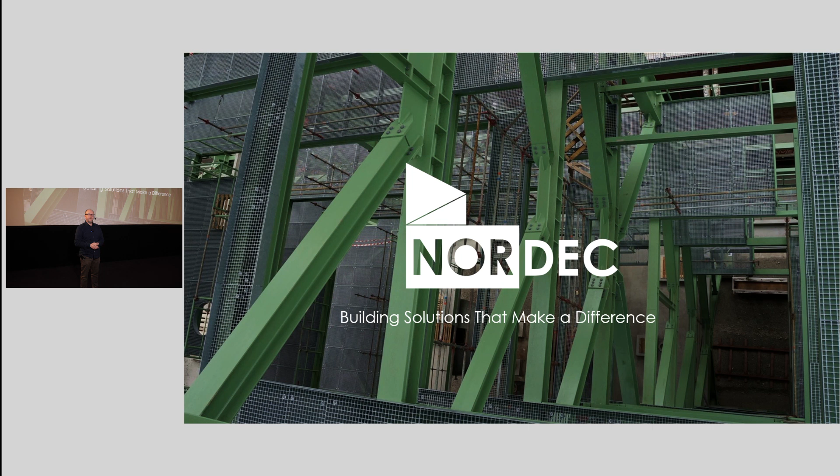So first, really briefly, who and what Nordec is. Nordec is a leading frame contractor in the Nordics. We're headquartered in Finland, but we have operations out in the whole of Nordics and Baltics, Poland, Germany, Czechia, and so on. Steel is really at our heart, and that's where we come from, our main material.

But we also like to mix and match different materials together in the best possible way. And we also like to be involved in the whole value chain in the construction process. We like to start from the design, take part in the product, or we do the production, installation, and so on. We really want to be involved throughout the whole value chain and the whole process, from design to ready-made project.

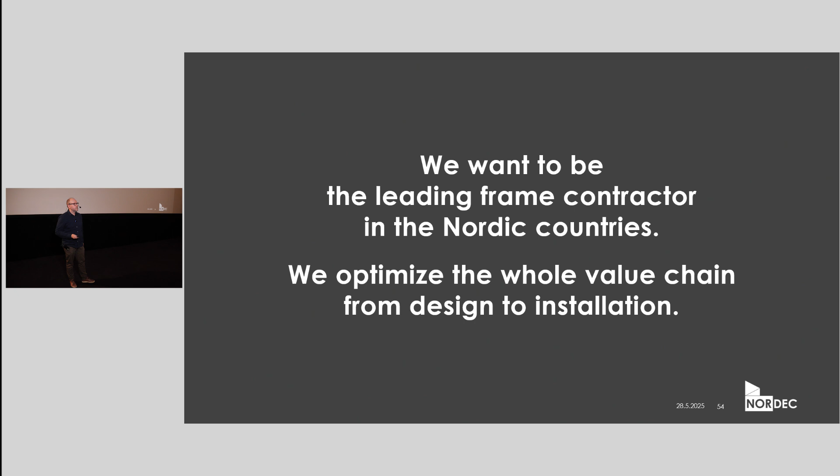So then coming to the main topic today, decarbonizing the construction industry and Nordec's journey towards this target. So first, a few painful facts. I think also the previous speaker told you these numbers roughly. I don't know any Lithuanian, but I can guess so at least.

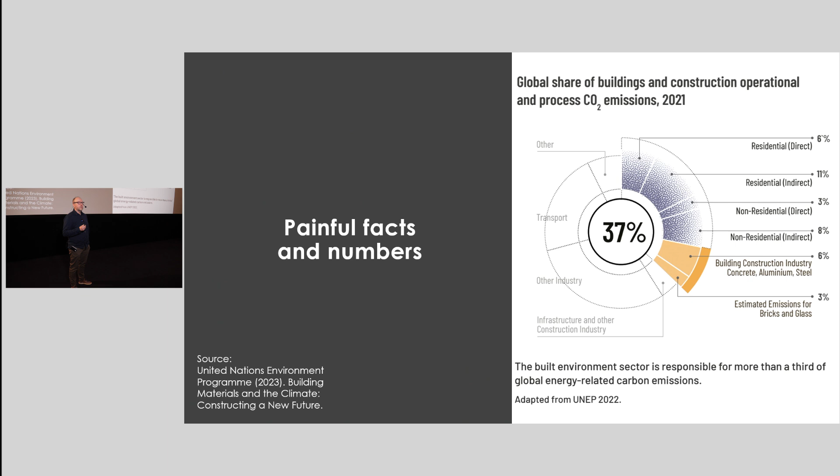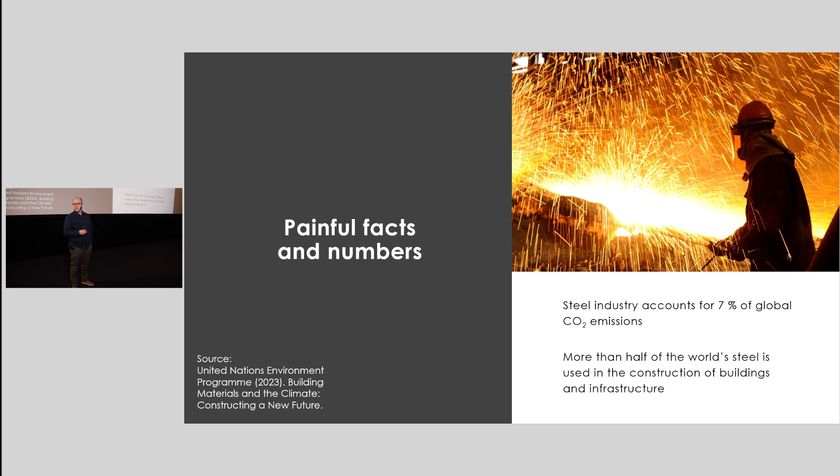We're living in the middle of a climate crisis, as we all know, and the painful fact is that the built environment stands for over a third of the global energy-related carbon emissions. And as we look at steel, steel industry or steel production is responsible for about 7% of the global carbon emissions. So we're talking really big numbers here. And out of this steel, more than half is used for the built environment, for constructions and for buildings and for infrastructure.

Then concrete. As we know, cement is the large polluter in concrete, and cement production is also responsible for another 7% of the global carbon emissions. And concrete is by far the most widely used construction material.

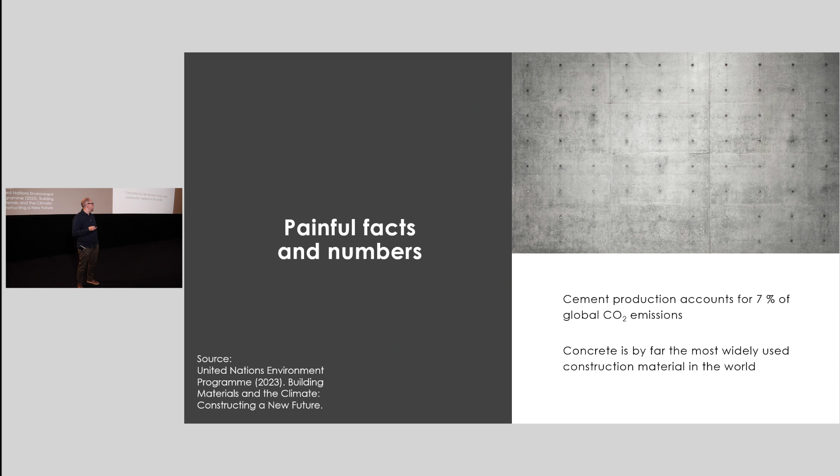So I think it's fair to say that we need to do something now. We can't just do business as usual anymore. But the good news is also that we can act now. We can do stuff, and we do it best together. We need to all pitch in and do something to avoid the climate crisis, starting from policymakers, planning authorities, developers, investors, architects, engineers, users, producers, everybody.

Just a short look at what's going on in the European Union with legislation and regulation that are coming. We have lots of things coming from the European Union affecting us in the construction industry: the new construction product regulation, EU taxonomy, eco-design for sustainable products regulations, and the EPBD, the Energy Performance of Buildings Directive.

I just wanted to point out that through this, life cycle assessment or whole life cycle assessment of buildings will become mandatory by 2028 for large buildings, and by 2030 there need to be national carbon limits for buildings in place.

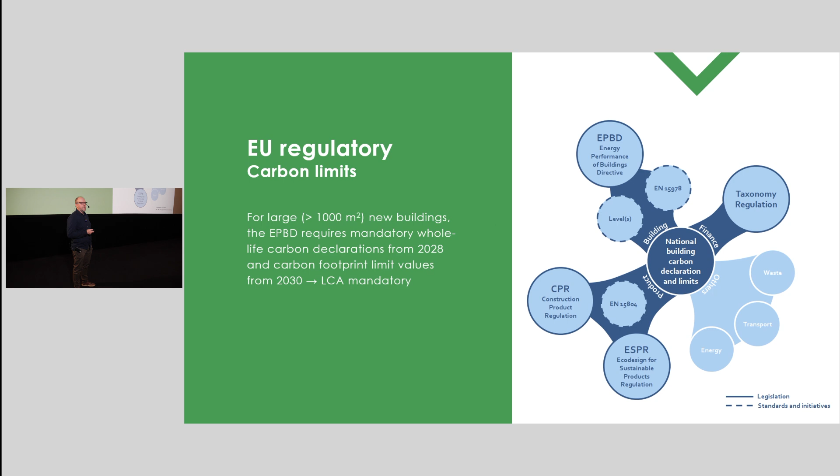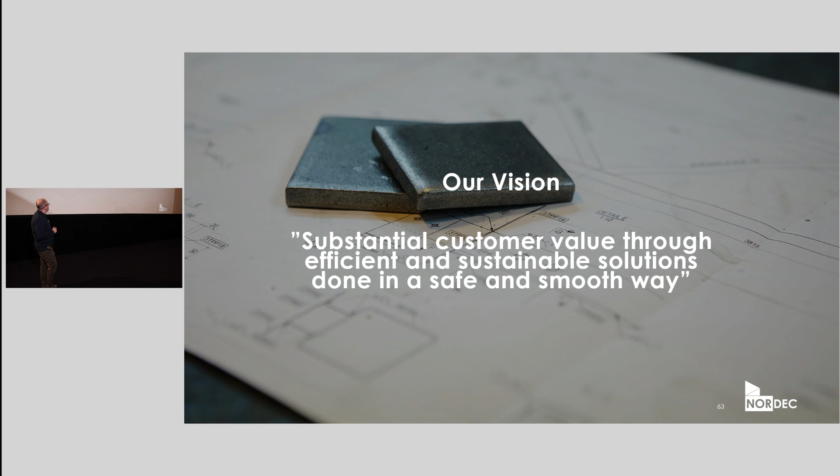Then, what are we at Nordec doing for sustainability? Sustainability is built into our vision, as you can see here: substantial customer value through efficient and sustainable solutions done in a safe and smooth way.

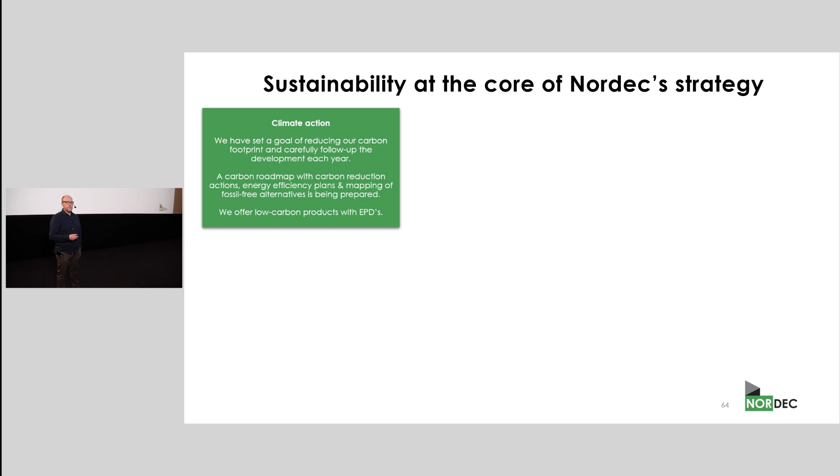So we work on sustainability through a few different topics. Sustainability isn't just climate action, but a lot else also, but climate action is of course one main topic, and I'll talk more about this in a few minutes.

But then we also have responsible sourcing. We need to take care of the whole value chain, so we like to really get involved with our suppliers and subcontractors and work together with them to enhance sustainability throughout the value chain.

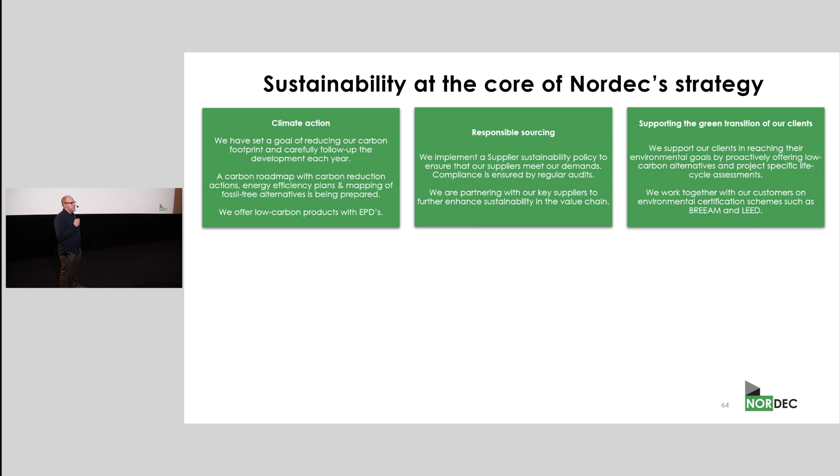We work closely with our clients, but I'll talk more on this also in a few minutes. And then we have a certified environmental management system, which in part means that we have a project-specific environmental management plan through which we take care of meeting all the expectations and requirements in the project.

We also think that everybody needs to be transparent with sustainability, so that's why we're now setting up a comprehensive sustainability reporting system. Part of this is that many of our clients are eligible for the EU taxonomy and want to align with its requirements, so there we also play a part and try to help them.

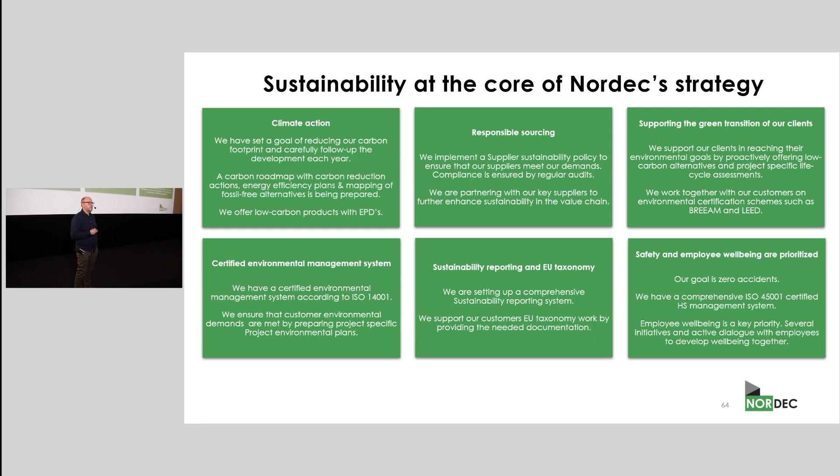Last but not least, safety and well-being is very, very important to us. We want to make sure that everybody can go home healthy and safe after the day of work, and our goal is really to have zero accidents. All of these are then anchored in 7 of the 17 United Nations Sustainable Development Goals, so we work from those and boil them down to our own targets and ways of working.

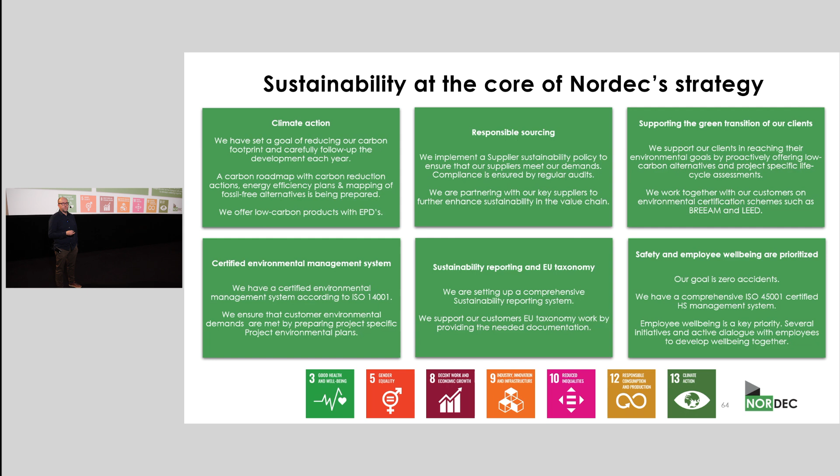Also, with regards to the carbon footprint, we have set targets on how we want to reduce it. For scope 1 and 2, we want to cut emissions in half by 2030. For scope 3, by 42%. If these scopes aren't familiar to everybody, scope 1 and 2 are basically the energy-related emissions, and scope 3 is everything else. But for many companies in the construction business, it's the raw materials and products that they buy and use.

We are almost already there, reaching our scope 1 and 2 emissions targets. We were at 49% at the end of last year, so we're quite close already, ahead of schedule. In scope 3, we still have work to do. For the steel products we make ourselves, we've set an even more ambitious target to cut emissions by 55% on average.

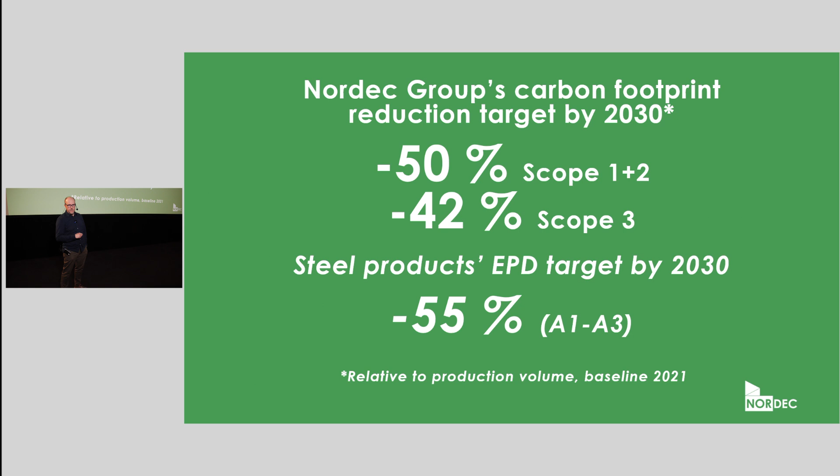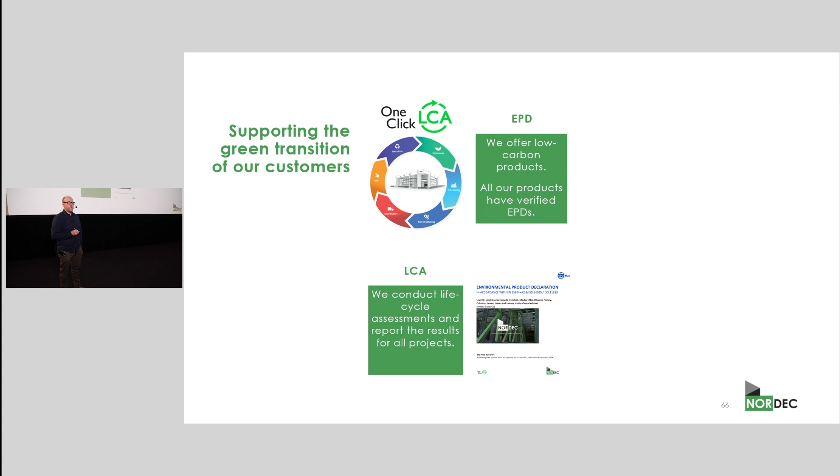So then coming to the clients and how we work together with them. One important thing is the life cycle assessment. For the projects, we do life cycle assessments and report the results. We have EPDs for our products and also offer low carbon products.

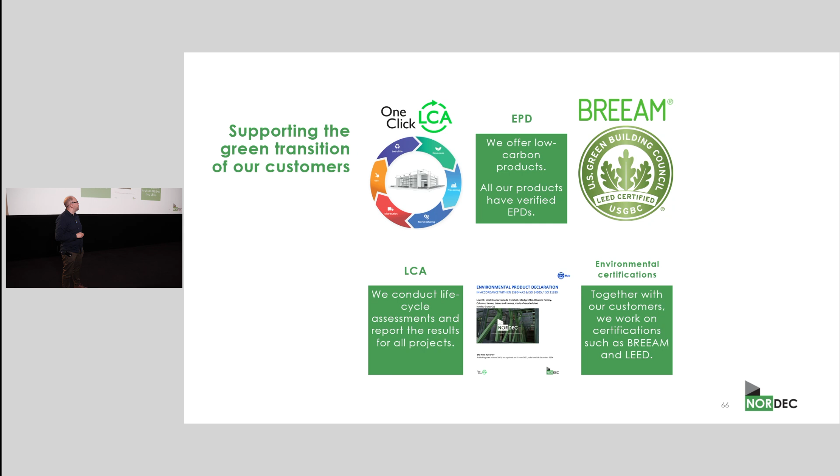Many of our clients work with environmental certification schemes like BREEAM or LEED. We are ready to support our clients in getting the essential points to reach the desired level they search for. Chemical safety is also important, not only for the environment's sake, but also for the health and safety of the people.

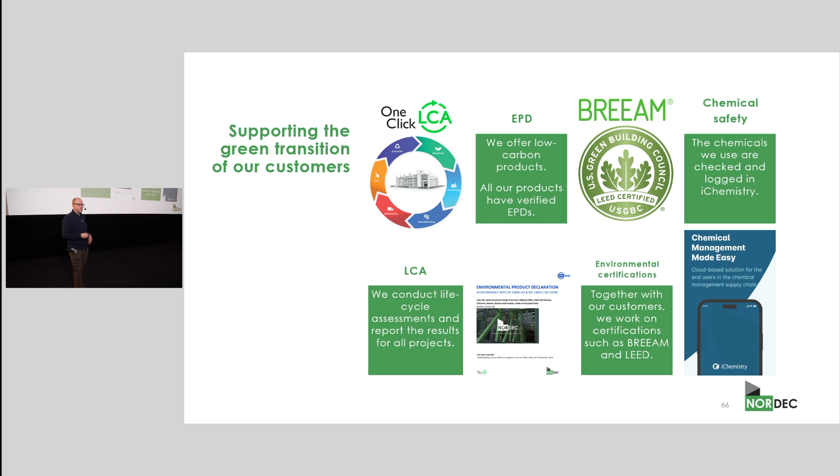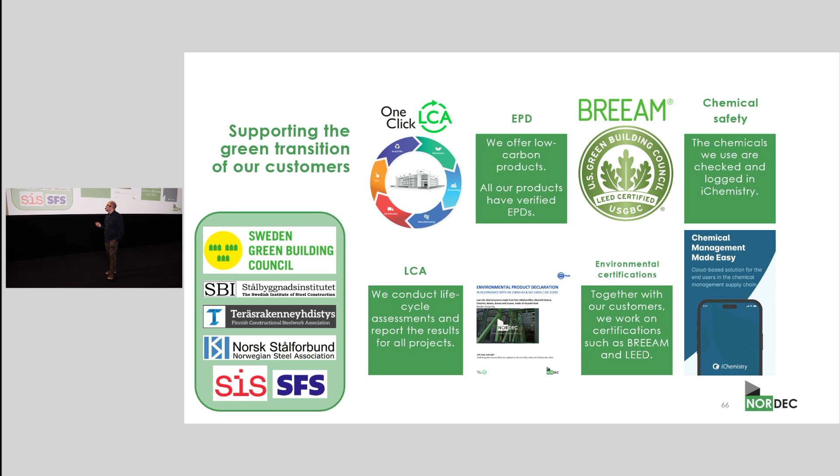All the chemicals we use are checked and logged in a system called iChemistry, which, for example, gives instructions on how to use personal protection. And with the whole business, we want to work together with several different associations and try to really push the industry as a whole forward.

So what's an EPD? The previous speaker also talked about EPDs. An EPD is an environmental product declaration. Essentially, it's a public and transparent way of declaring the environmental impacts of a product throughout its whole life cycle. The good thing is that it's third-party verified, so it's reliable and you can trust the results.

Nordec has several different EPDs. We have general EPDs covering basically everything we make, but we've also developed several low-carbon products and EPDs for these products based on recycled steel. With the help of these EPDs and low-carbon products, we can decrease the carbon footprint of the products by 35 to even 70% already today. And of course, we also work all the time on new products and new EPDs, so something is happening all the time.

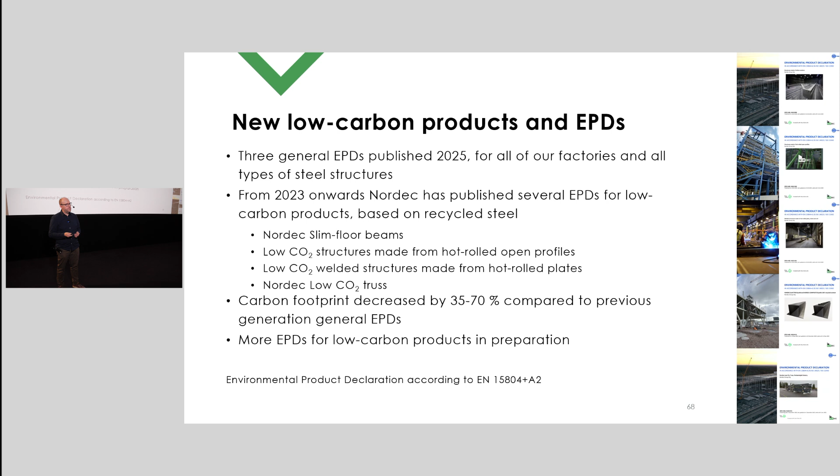Then if we look at the projects, as I said, we really want to work closely with the projects and clients throughout the whole process. We want to be involved in the design phase and optimize the solutions to find the best possible solutions, comparing different solutions and combining the materials in a clever way. To support this, we have project-specific life cycle assessments through which we can compare different solutions from a carbon footprint point of view, and of course use low carbon products in the projects.

Here are 3 different examples of projects where we have helped our clients reduce their carbon footprint. In a logistics center in Finland, we reduced the carbon footprint by 20% by combining materials in a clever way. We didn't just sub-optimize the different parts alone or try to use as much steel as possible, but we really tried to find the best solution and combine different materials.

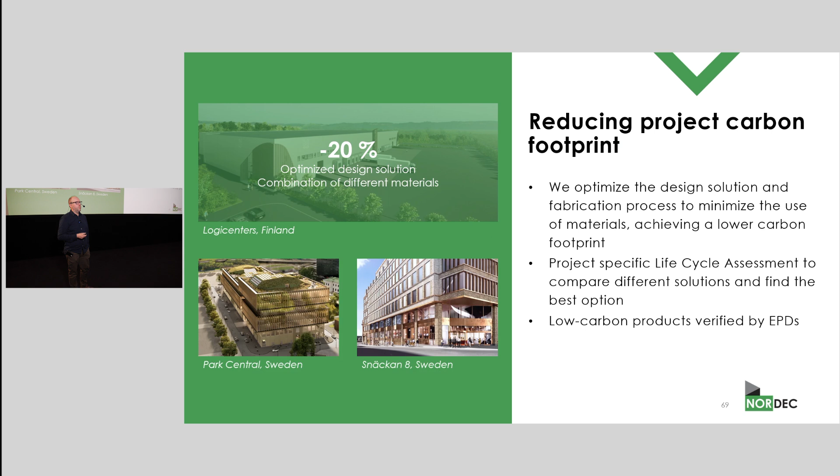Then 2 office projects or multi-use buildings in Sweden. In both of them, we really worked hard with the design from an early stage on in the process and used low carbon products. We were able to cut the carbon footprint of the frame by roughly a quarter in these projects.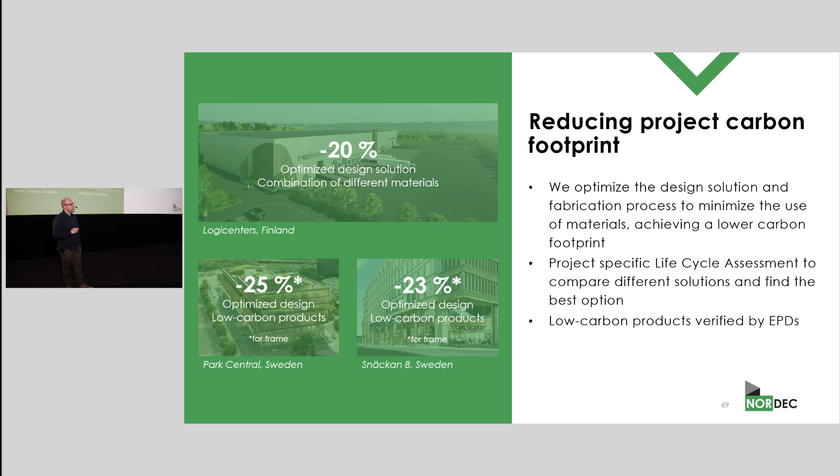But this is still not enough. There isn't enough recycled steel in the world to cover the needs of the construction industry, and we still need to get better figures and lower carbon footprint.

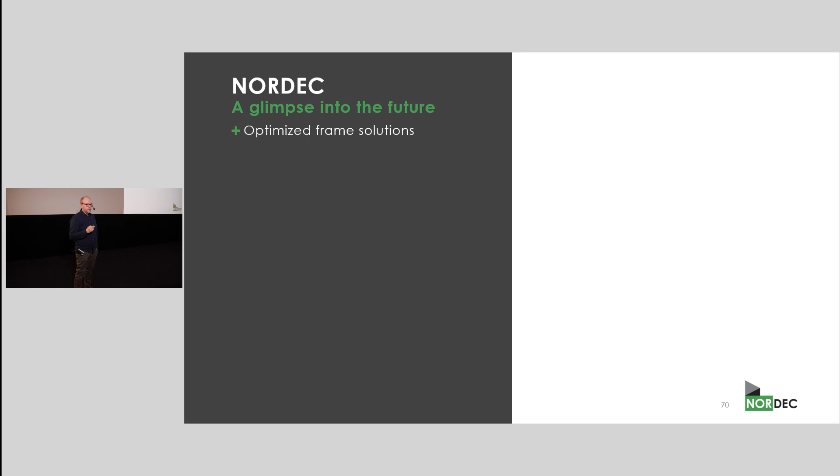So what we want to do in the upcoming few years: of course we continue optimizing design solutions. We keep production efficient and minimize scrap, for example. We focus on transports, trying to make them efficient and use bio-based fuels and electricity. And installation can be done in a fossil-free way, using no fossil-based fuels.

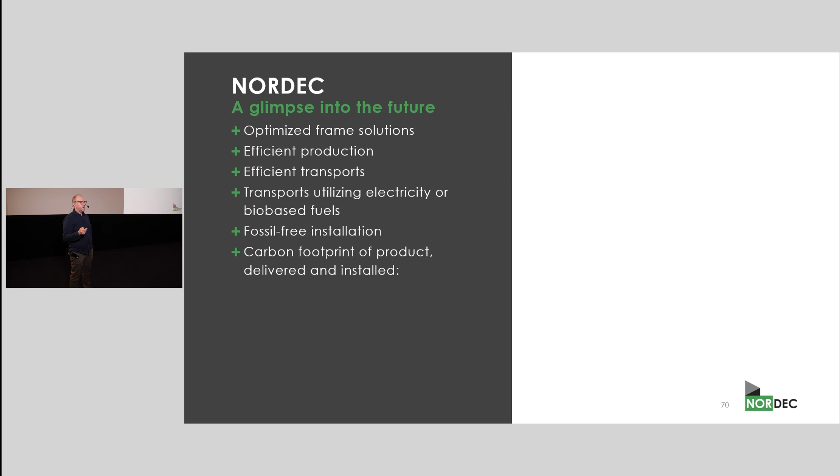Then we can achieve a carbon footprint of the ready-made product, not just the raw material, but the ready-made product, of less than 0.5 kilo carbon dioxide equivalents per kilogram of steel. Compared to iron ore-based standard steel products today, that's a reduction of even 80 to 85%, so quite a significant reduction.

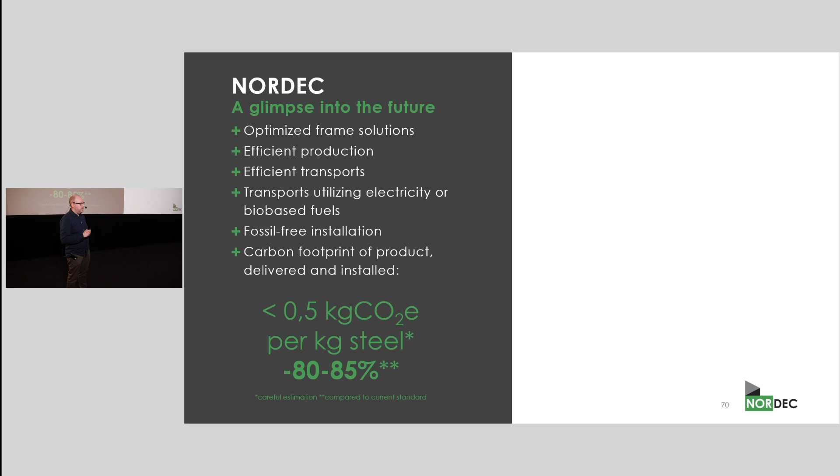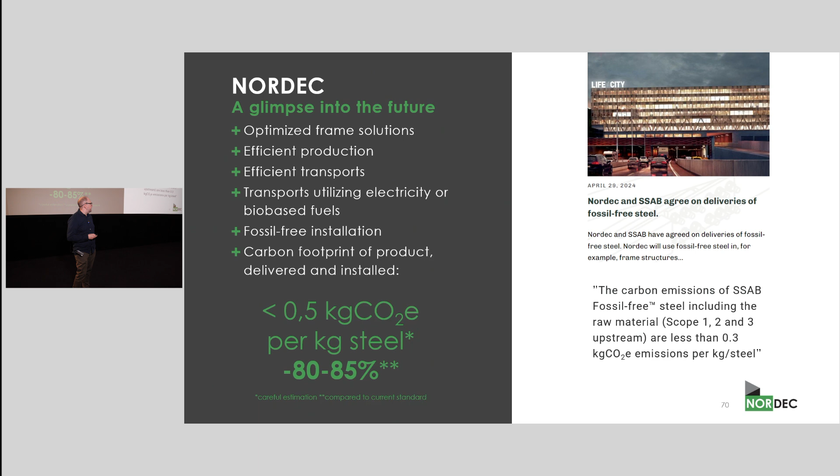And I will even tell you the secret behind this nice number. It's of course the next generation iron ore-based steel that's based on hydrogen reduction instead of carbon reduction, which is used today. We have an agreement with SSAB on deliveries of fossil-free steel when they ramp up production eventually. And of course there are other producers making this same change, going for hydrogen reduction instead of carbon reduction of steel or iron.

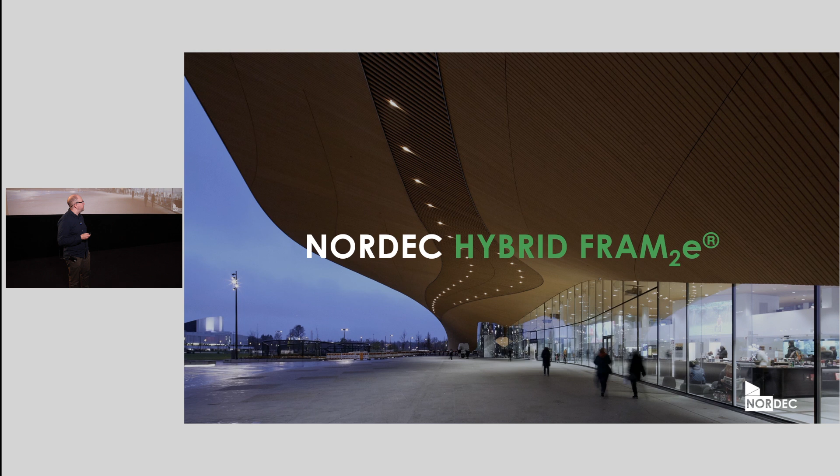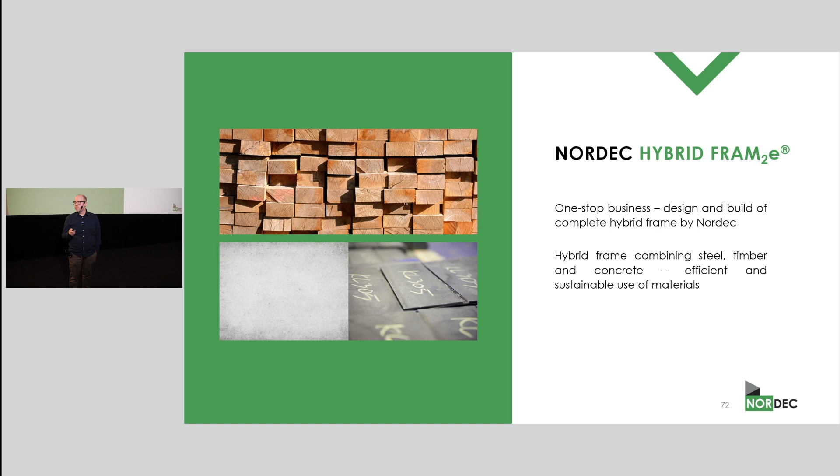So one exciting possibility that we have is a hybrid frame. Basically it's a frame where we combine steel, timber and concrete in the best possible way, the most efficient and sustainable way. We have a very large palette of different kinds of structures that we can combine in a really flexible way to build up the frame for each specific case and project, based on using steel, concrete and timber with as low carbon footprint as possible.

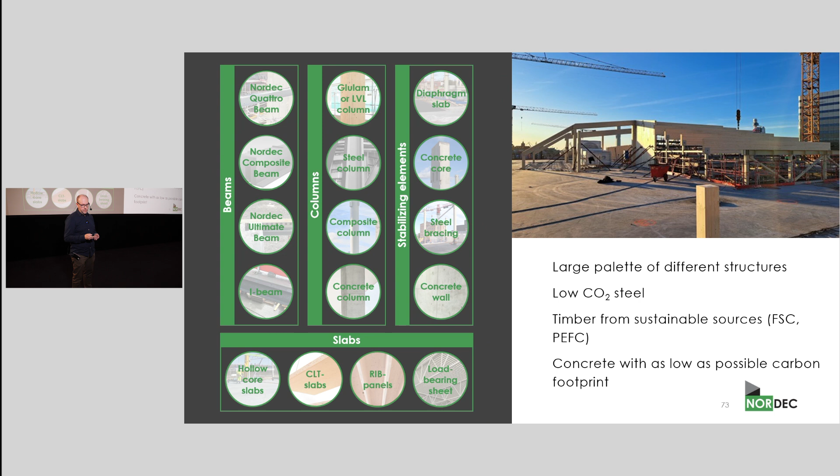And beneath this we have an office concept, which is basically a pre-designed office concept that we can take and use, and of course modify for specific needs. It's an office for up to 8 stories high, 1 hour fire rating, with a grid of 7.2 times 6 meters. So we have a column beam frame basically.

The benefits we really gain are the lowest possible carbon footprint, and also an open flexible space, meaning we can fit different use cases or scenarios into the building. This is also good from a sustainability point of view, because we can extend the life cycle of the building. When we build something, we need to make sure it stays in place and in use for as long as possible, because using a building for only 20 years is kind of a waste.

We have a slim floor solution, so we don't have anything protruding much beneath the slabs, so we don't interfere with installations. And we have a really lightweight frame, so we can save on foundations, and it's also possible to use when you want to build on top of an existing building, for example.

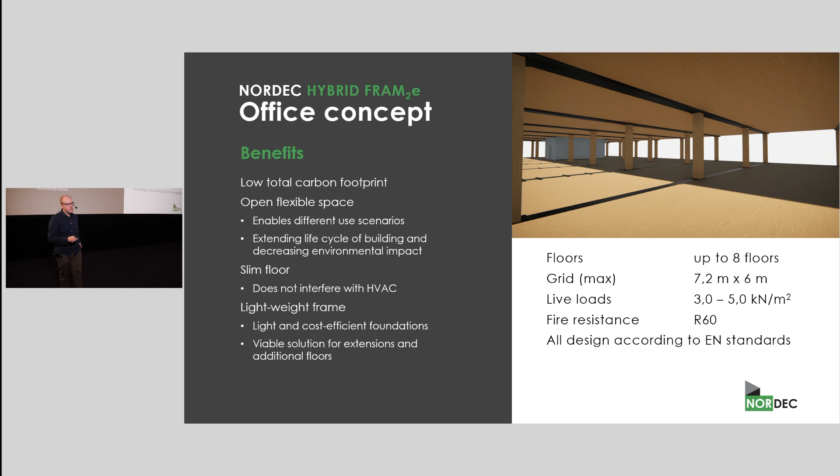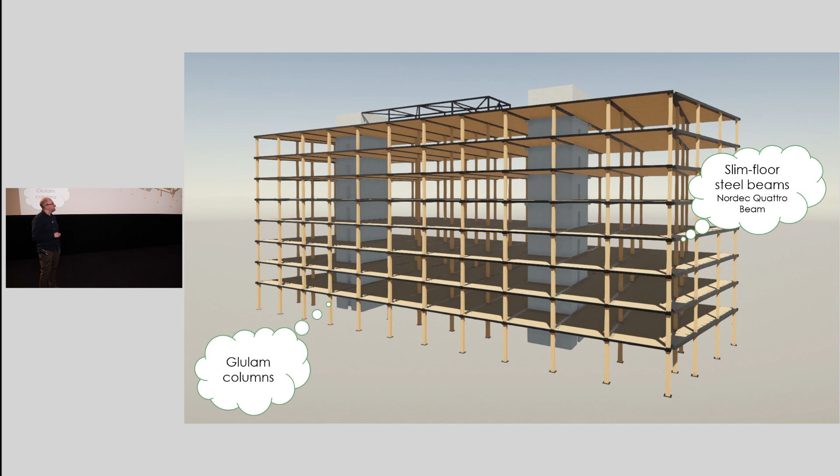So the office concept consists of the following parts: we have glulam columns, timber columns; steel slim floor beams, Nordec quattro beams; then CLT, cross-laminated timber slabs; and steel edge beams.

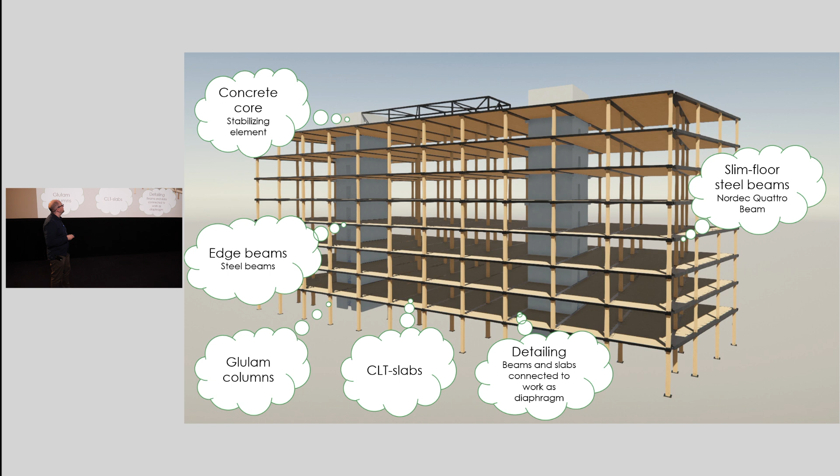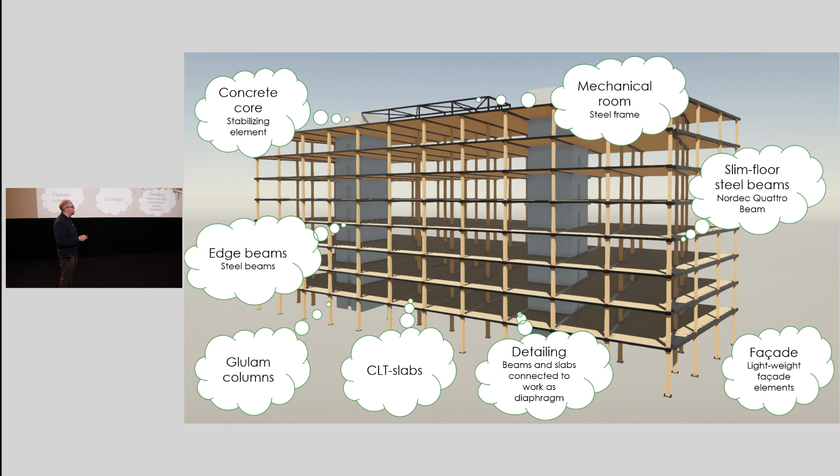The detailing here is quite interesting, as we've made it so the slabs and beams work together as a stabilizing element in the plan. Then we have concrete shafts working as stabilizing elements in the vertical direction. The facade is a lightweight facade element system, and the mechanical room is a lightweight steel frame on top of the roof. So this is basically what the office concept is made out of, and through which we can make an efficient and low carbon frame.

As you know, the devil often lies in the details, and we have really thought the detailing through in this office concept. We use mainly, almost only, screwed connections. This makes the installation phase quick, safe and efficient, but it also enables us to dismantle the building or parts of it if needed quite easily, and reuse the parts again and again as such or with small modifications. So it's a really good fit for the circular economy.

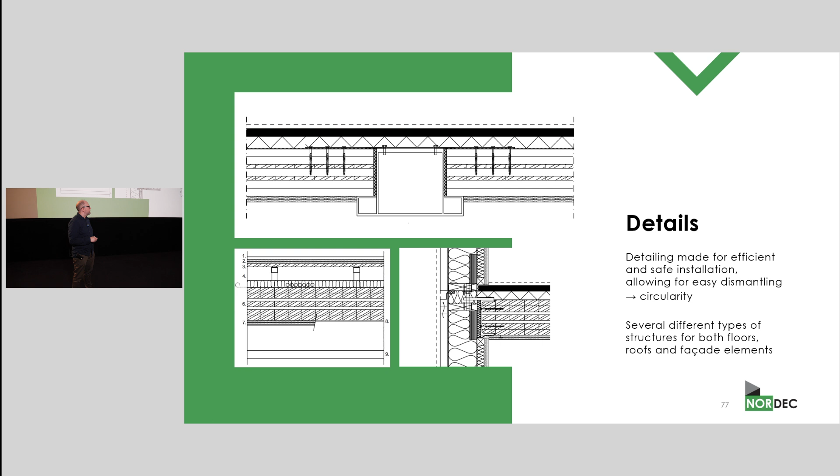Then finally, I think I have good time for this final carbon footprint comparison. We have compared the carbon footprint of the office building with different solutions according to the European Level(s) system. This is for the product stage, A1 to A3 according to the EPD or life cycle assessment, for the complete floor and column system. They're technically comparable, meeting the same requirements for fire, vibrations, acoustics and so on, so you can compare them.

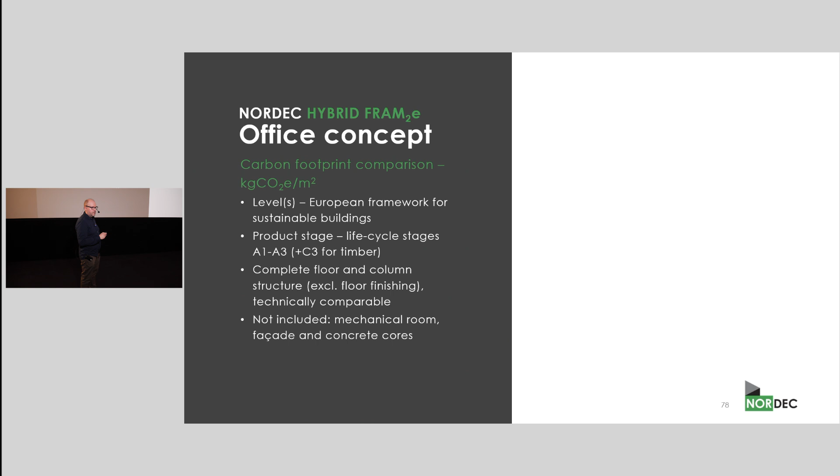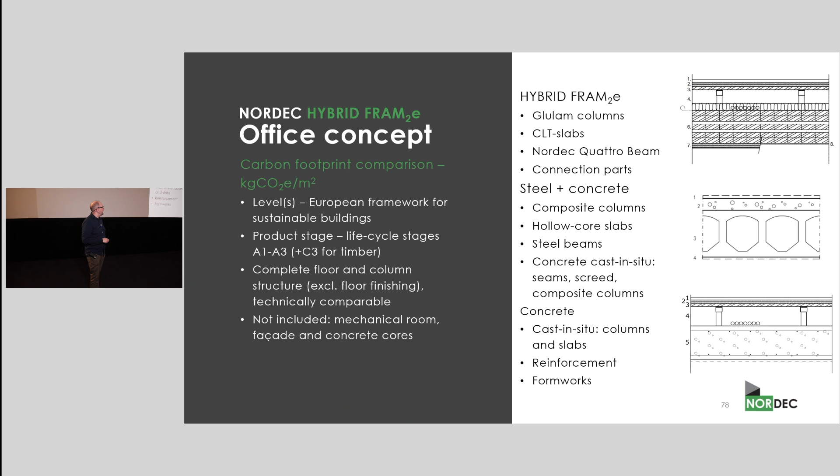What's not included in the comparison are the concrete shafts, the mechanical room, and the facades. So it's not the whole building, but a significant part of it. Here we have compared the hybrid frame with glulam columns, CLT slabs and steel beams; a kind of Nordic standard solution with hollow core slabs and steel slim floor beams; and a cast in situ concrete frame.

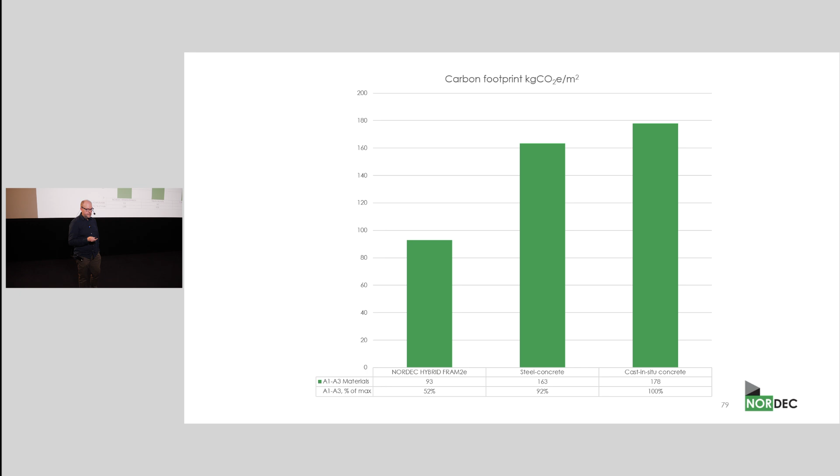So by doing it like this, if we see from right to left, the cast in situ concrete frame is the worst from the carbon footprint point of view. If we switch to a steel concrete frame, we can reduce the carbon footprint by roughly 8 to 10%. But the real benefit is when we take timber into use also—then we can cut emissions in almost half. So this is a significant improvement compared to standard solutions.

So to wrap up with 2 minutes to spare: let's all be part of the solution. Let's get away from doing business as usual and being a problem. Let's be part of the solution. Let's really work on this together to solve this problem, because nobody can do this alone—no company can do it alone. We really need the whole construction industry to work on this together and avoid, or stop, the climate crisis that we are living in. That's all from me. Thank you.